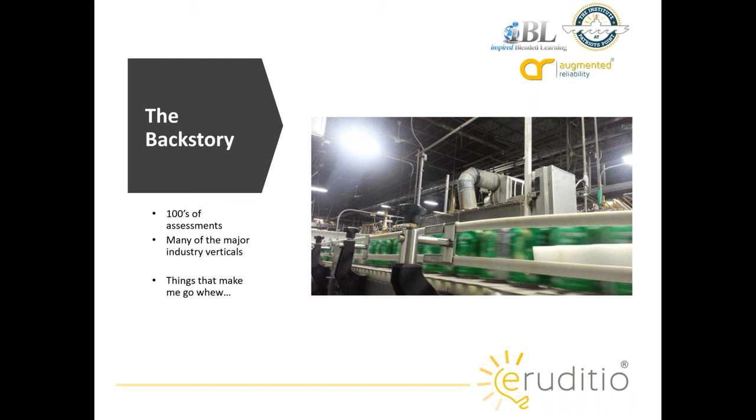So with that said, what I would like to do next is have you participate a little bit. I want you to think about your facility. Think about what you've got going good for you. Do you have certain people like planners or reliability engineers in place? Do you have a really supportive leadership team? Do you have just any one of a number of things? What are you thankful for? Take just a minute, go down to the comments field or the questions field, and put a couple things in there that you're thankful that you have at your site and you believe it's going to help you get the reliability that you're going after.

I'm going to give you guys about a minute to do that, and then once Maureen gets a few of them, she's going to read them off to us. Don't be shy. All right, I'll give you guys just a second more, but go ahead and submit a couple things. Hopefully you got something you're thankful for in your facility. There's got to be something. So if you can, put those out there, and we're going to talk about those more as we move forward.

All right, we've got some answers coming in. Shall we start letting me know what they are? That sounds good. All right, so I'm seeing they are thankful for a very competent mechanic/electrician crew. That's nice, good one. Grateful for management that trusts our decision making, even if they haven't fully understood it. Grateful for good planners, and I promise I didn't pay someone to say this. Grateful for ultrasonic equipment. Grateful for a good reliability engineer. Grateful for a CMMS system that keeps better info. Grateful for a lubrication engineer who's been able to standardize on lubricant for them. Grateful for a client that wants to make a difference in their maintenance world. And let's see.

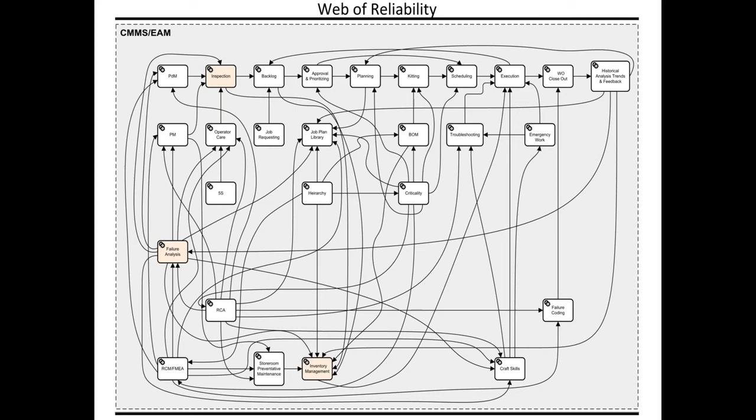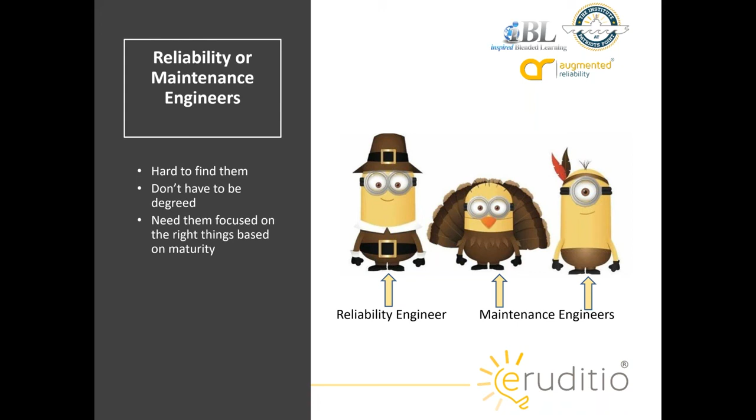Maintenance engineers get down in the day-to-day. They help folks write better maintenance procedures, try to identify and eliminate stuff that we're inducing into the system from a failure standpoint. Whereas your reliability engineer is analyzing more data, focused more on the long-term picture, really trying to take you to the next level. You don't ever just want to have one or the other. It really needs to be a blend, but my experience tells me that blend needs to be based on the maturity of the organization.

Now, what do they do? In case you don't have them in your facility, I threw a few slides in here. I'm not going to go into the nth degree of detail, but I do want to talk a bit about what I'd expect from a maintenance and reliability engineering discipline within a facility. And I say discipline because I don't think they have to be degreed engineers. I think that's a mistake a lot of folks make.

So if I go into a facility and find a technician that's been promoted into what they call a reliability technician role or something like that, and I see that they understand the kinds of things I'm going to talk about in the next couple slides, I'm still thankful. That's absolutely what I'm looking for. It does not have to be a degreed engineer.

So with that said, these are the failure curves, the 6 failure curves from the original Nowlan and Heap study. I and a couple other folks in my organization are spending a lot of time digging into the data on these. We believe there's a bit of misinterpretation of what these mean, but what I will say is there's a big piece at the bottom that says non-age related failures are 89%.

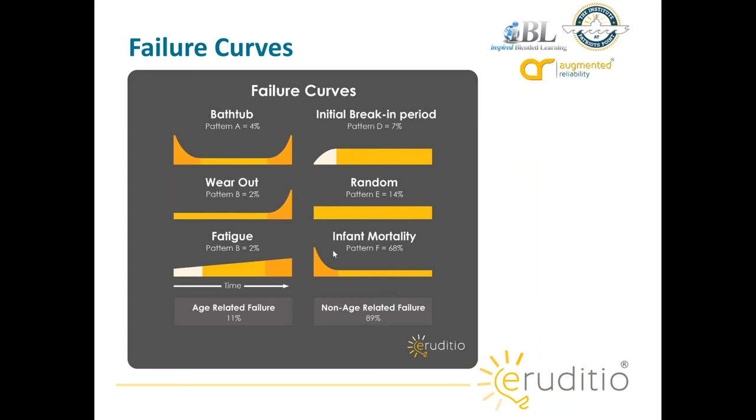So some of the other things you'll see from a reliability engineer or maintenance engineer, they start to understand something we call the P to F curve. This curve talks about how assets fail and what their probability of failure is. As it goes down the curve, the probability of failure is going up. But it also tells us that using things like ultrasound and vibration allow us to detect these problems much earlier on the P to F curve.

And that gives us time to then go back to our planners and schedulers and say, hey, let's plan and schedule this repair and make sure we do it at the lowest cost with the highest value and the highest safety that we can bring forward.

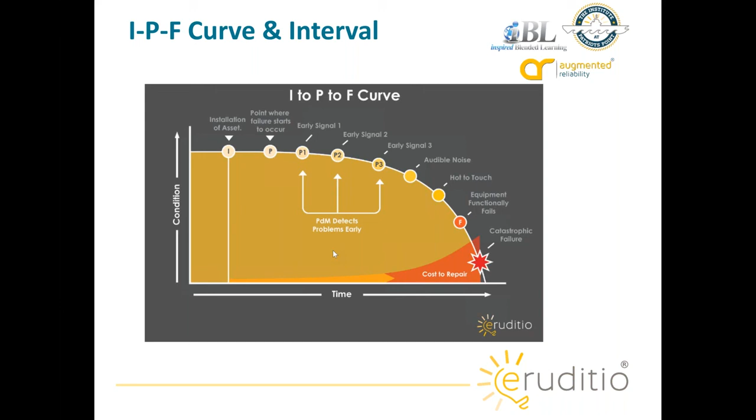So this curve becomes something that a lot of maintenance engineers and reliability engineers are really playing over in their heads, trying to understand: is our maintenance strategy all the way down there close to F, where the equipment fails within days of us detecting it? Or are we detecting things early enough to truly plan and schedule those repairs, reducing the total cost?

Now, the next area that maintenance engineers especially focus on, but reliability engineers spend a fair amount of time in as well, is something called equipment maintenance plans. Over the years doing assessments, this is one of the things we always look at. A lot of times the equipment maintenance plan is just a combination of steps and PMs provided by the original equipment vendor, or a combination of things added in the middle of the night because something failed and somebody wanted to say in the morning meeting that they'd done something about it. There's just a lot of junk in equipment maintenance plans.

So when you start breaking them down into the individual task level, which is what we do with our equipment maintenance plans, and you start looking at the failure modes and the tasks, you start to realize that many of those failure modes have no coverage. There's nothing to detect them in the current plan we have. On the flip side, you also notice there are things in there that people recommend doing that have no real effect on a failure mode.

So it's just a completely non-value added activity. With that said, as you go through and scrub and analyze your PMs and optimize them, adding in things like condition-based maintenance into those equipment maintenance plans, you start to scrub out a lot of non-value added activity. But more so than that, you start to truly address failure modes, and it becomes a failure-mode-based maintenance strategy.

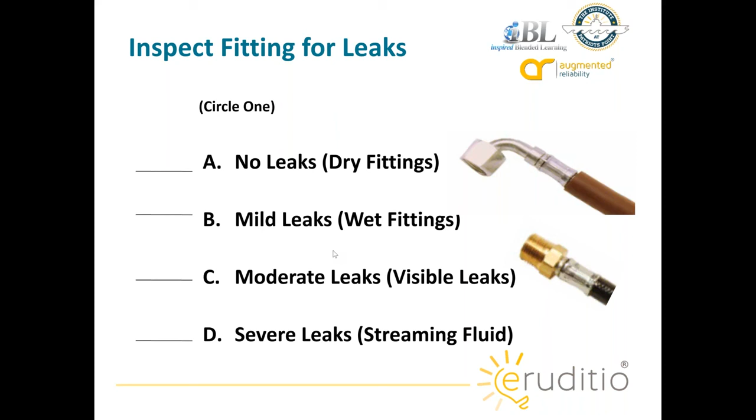We work quite a bit in automotive, and one of the issues I see there regularly is equipment was designed to last 7 years, the period of time an average car model runs, and now they're asking it to run 14 or 21 years. That thinking is changing. It's not designed to last the life cycle they now want, and that's leading to some of those issues.

How do we buy it? Do we buy the cheapest thing out there, or do we buy something that takes into account what we call life cycle cost? In other words, do we buy something with the cheapest purchase price, or something that will have the cheapest total cost of ownership over its life cycle?

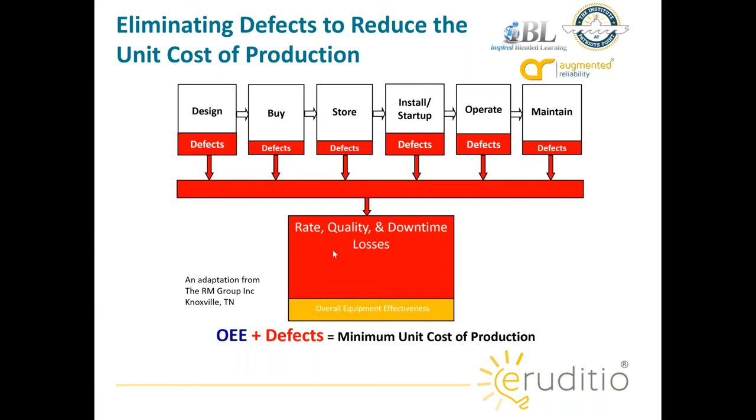Now here's one I think is absolutely critical, and when I see a facility that has this, I am always thrilled. When I go into a facility that doesn't have it, I let out a little sigh. Because over the years I've worked with a lot of reliability implementations in a lot of different facilities, and if they don't have a good burning platform, it is really, really hard for them to be successful.

And what I mean by that, I'll give you an example. I went years ago into a pharmaceutical facility, and their reason for doing the maintenance improvement effort was because one of the big five consultancies told them they should. That's not a burning platform.

And because of that, they really struggled putting the effort in to be successful. Now, I'd say they made great progress and did good things, but they didn't get to the level of performance they could have if they'd been able to really drive the organization forward.

Now the flip side of that - those of you who've heard me talk about change management know I talk about a paper mill up in Canada I worked with about 8 or 10 years ago. When I arrived, they told me they were closing 2 mills every year. They were measuring it off their conversion cost, what it cost to convert raw product into final product. And these guys were, let's just say, second to last. So if you're closing 2 mills every year and you're second to last, it's not looking too good from that perspective.

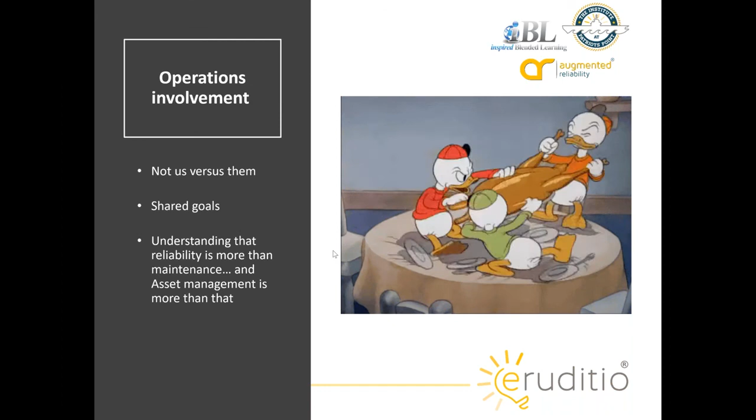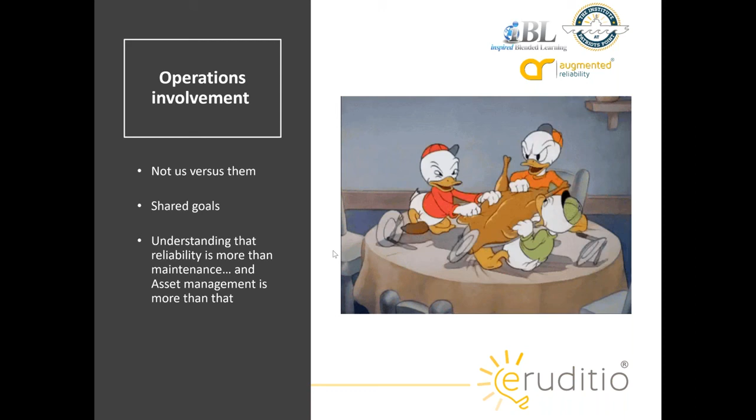Now, I am going to caveat this one because I don't think you necessarily need to get operators involved right out of the gate. I think there's a time and place. I think you need to get your house in order first. If you're not planning and scheduling work, if you don't have a good way to get work requests through the system in a timely manner, then operator care is just going to mess everything up because they're generating a lot of requests and you're not doing anything about it. And then they quit generating requests and go back to doing things the way they used to. So operator involvement is something we definitely want. We want them involved from the beginning, but we want to get them really involved after we get some of that foundation in place.

Now, one of the issues with operations and maintenance is they see the picture differently. If you take a look at this picture, I'm going to give you about 15 seconds to look at the graphic and think about what you see. So some of you, I would imagine, see 6 animals on this picture. Others of you, however, see 3 twice. And I think that's one of the things we have to keep in mind, and it goes for all of us. At the end of the day, we have a very good understanding of the way we see things, but do we have a good understanding of the way the rest of the organization sees it?

What I mean by that is I hear a lot of times maintenance folks will come to me and say, well, operations will never give me the equipment. And I get that, and I know that's a problem. I know that doesn't allow you to get your PMs done, and I know that doesn't allow you to do corrective maintenance work. But I have to turn around and look at it from operations' side. The last time they gave you the equipment, you didn't give it back to them on time. Or the last time they gave you the equipment, when they started it up, it didn't run. So, yeah, I kind of see why they may not be interested in giving you equipment, because every time they give you the equipment, they suffer the downtime coming out of it.

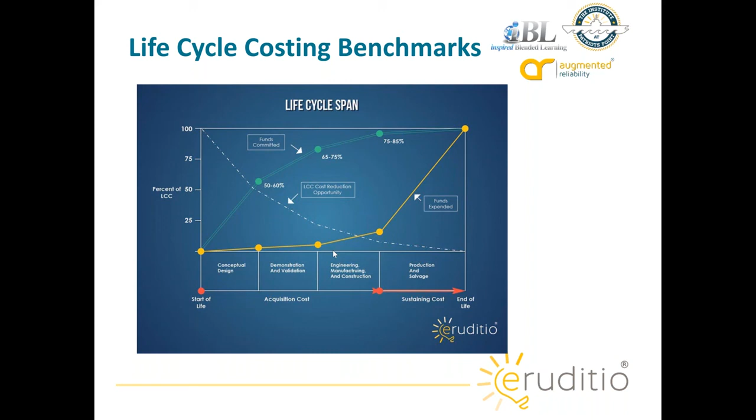A couple more things I'm thankful for, and then we'll wrap up here. The next one is definitely PDM and CBM, predictive maintenance and condition-based maintenance. I think it's a very powerful tool.

An example of that would be that we're able to identify something early so that we can plan and schedule that repair. That planned and scheduled repair is going to be safer, done at a lower cost, and with less infant mortality induced failures. It's just got so many benefits that all come from the PDM and CBM standpoint.

So if I go into a facility and I see that they have good PDM technologies — ultrasound equipment, vibration equipment, infrared, those sort of things — I'm excited already. Now, the second thing that makes me even more excited is if I walk over to those cases and there's not 2.5 inches of dust built up on top of them.

Unfortunately, that happens in a lot of facilities because they'll put these technologies in play, but they don't have the processes to support them, so they don't get the results that they expected, so they quit doing it and put them on the shelf. At the end of the day, get your processes in place. That's going to help you use these tools very effectively.

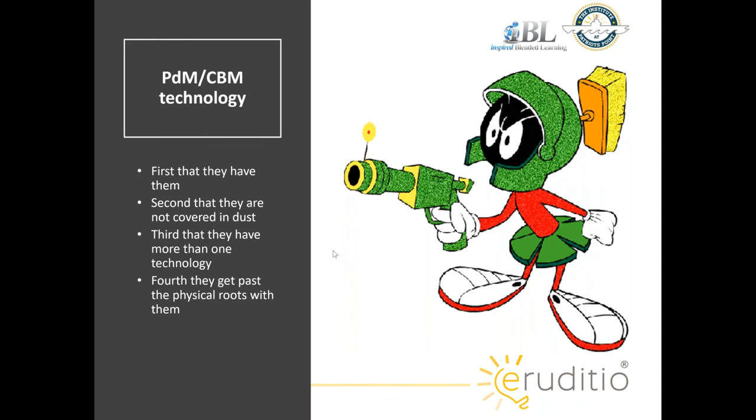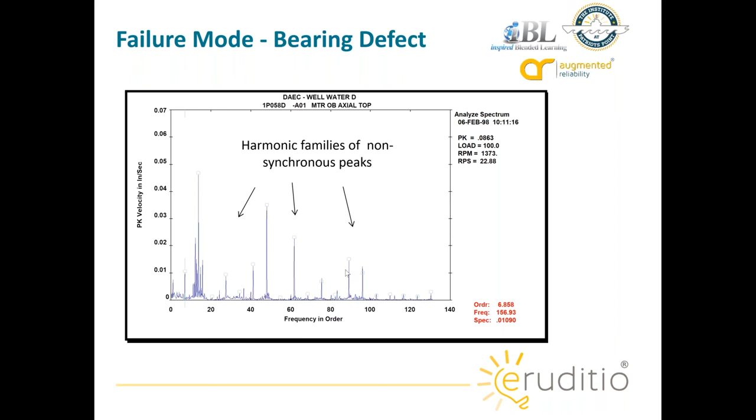A lot of times we'll use vibration to identify these, and the technician will then put in a work order that says replace the bearing. Well, that's great. But at the end of the day, if the individual just puts in a work order to replace the bearing, what we're going to find out is the bearing's just going to fail again. The bearing is going to travel down that same P to F curve, just like the last one did.

So yes, we're going to get the opportunity to catch it on another vibration route, and we'll get another catch. But at the end of the day, if we had used the predictive technologies to empower our processes, then we would have been able to detect it, identify what caused it, and then prevent that from happening at the systemic and latent root level so that it doesn't repeat over and over and over.

So if you've got the predictive technologies, that's great, that's wonderful. But if you're not using the predictive technologies to empower your problem solving and root cause analysis, then I think you're missing a piece there. And that'll give you a little something more to go after as you move forward.

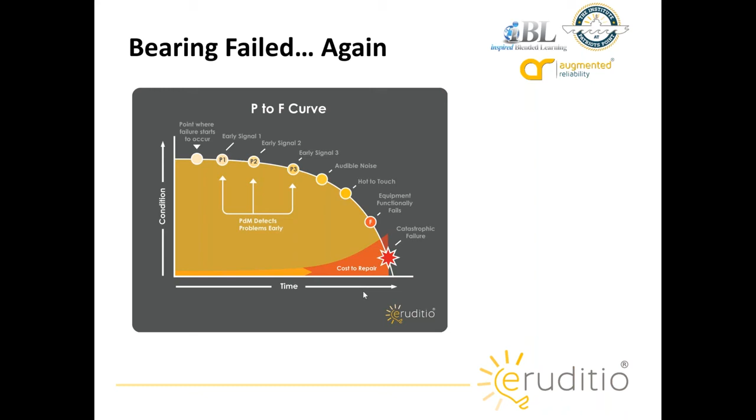Now, in this example, I like to show the fact that the reason this bearing failed was because somebody chose to install it with a hammer. All right, and we see this a lot in facilities. It's something I refer to as percussion maintenance.

Instead of using precision maintenance — instead of using a bearing heater and heating this bearing up and sliding it onto the fitted shaft — instead we just grab a hammer and knock it on. Works great at home in the garage. Why would it be any different in the plant? And then we end up with the defects that you can see on your screen. So this is a perfect example, though, of where using the predictive technologies, I can catch this bearing failure very early.

Because I caught it earlier, I can cut open this bearing and take a look at it before it's destroyed, and I can see what occurred. The evidence will be here that will help me with my problem solving. If I'm just running it to failure, by the time it fails, all of this evidence will be destroyed. It'll be spalled out internally, or it'll be a puddle of metal on the floor. So we can't use it to understand what really caused the problem to happen.

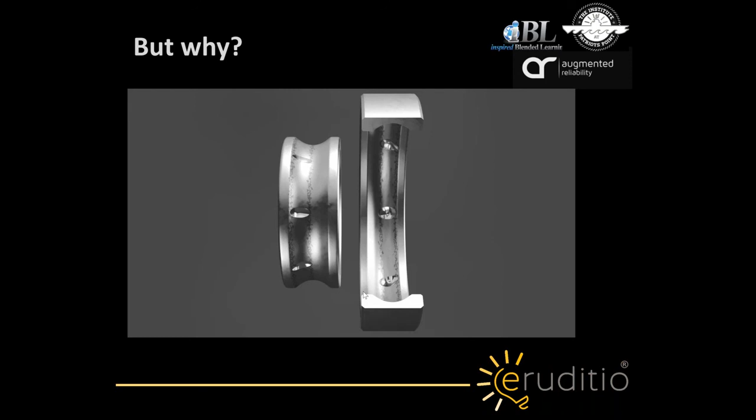So your PDM tools, of course, make your planning and scheduling process more effective, but they also empower your problem-solving process to make sure that you don't have repetitive failures.

So that's a simple example of a root cause, but we're drilling down into that problem using the data from the technologies to better understand our issues and what caused them so that they don't happen again.

Now, I brought a few more technologies here with me. I'm going to kind of move through these quickly, but the main point I want to make here is that there is not just one technology. You can't survive just off of ultrasound. You can't survive just off of vibration. You need to have a set of tools.

And so I'm really thankful if I see that they've got vibration, ultrasound, infrared as part of their program, because I know there's going to be a better chance that they're going to be able to detect more of the common failure modes moving forward.

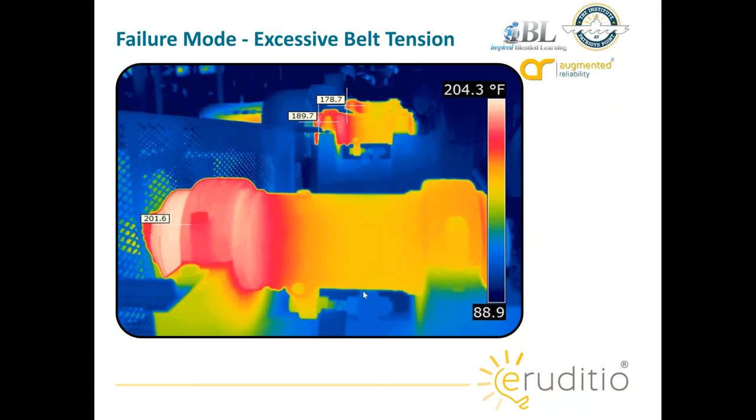And so there's three really quick IR examples that are completely different. We're using one for mechanical, we're using one for an electrical issue, and we're using one for what I'll almost classify as structural, although you could probably argue that it's mechanical. But there are different ways of using these tools. Don't be afraid to branch out.

And I'll play this sound real quick so you guys can hear it.